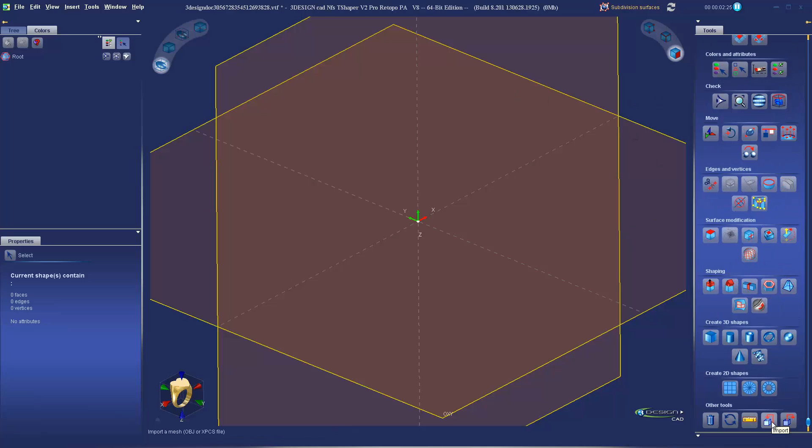The first feature I want to talk about is importing. A lot of users have requested better importing of objects from other softwares. And one thing that helps with that is, let's go ahead and import. I have a ring set up here.

This ring was created in 3Shaper, and then I exported it out to another sculpting software. Like most sculpting softwares, it remeshes your item to be able to sculpt in the other software. When I bring it back into 3Shaper, we notice that there are some small holes where things didn't quite line up. If I look in box mode, there's nothing wrong with the mesh itself, the polygons are all intact. But sometimes your control points, your vertices, get superposed, meaning they're on top of each other but not quite connected. So in smooth mode, we see little tears in the surfaces.

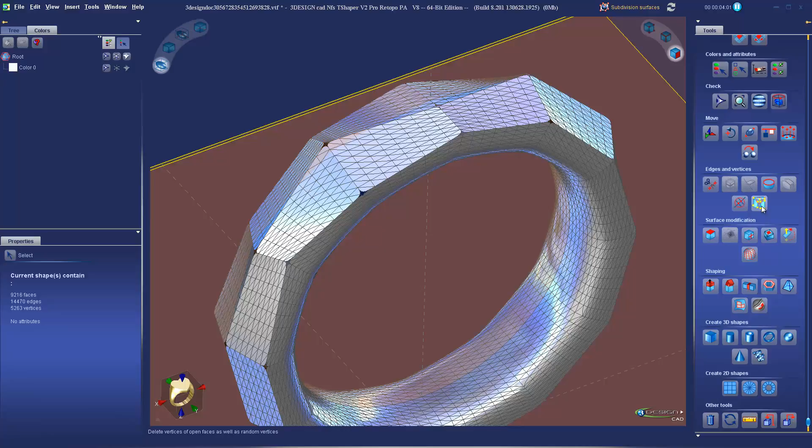The easy fix now is the new Connect Vertices tool. Before, you would have to find these and connect them one at a time, you'd have to know where they are. The new Connect Vertices tool, as soon as I launch it, will display all those bad connections. With a simple click of this button here, Merge Vertices, it's going to fix those holes for us.

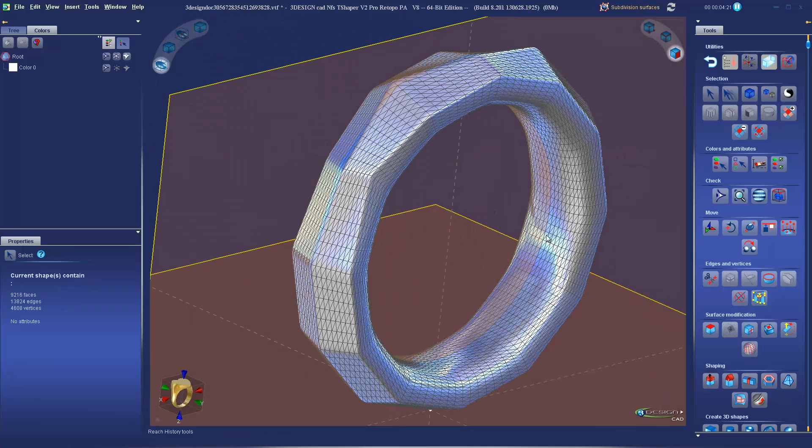Now, if I go back into 3Design, we see I have a solid object. It's ready to go. I could shape it further in Shaper, come back into 3Design, maybe add some pave or stones or whatever else I want to do to it. So, great new improvement on importing.

Speaking of sculpting, I want to talk about the new brush tool. Here's another model I've imported, an OBJ I found online, and you see it's already pretty well refined. Instead of having to go in and modify all the points, edges, and faces by hand, a simple way to maybe add some detail to this guy is to use the new brush tool.

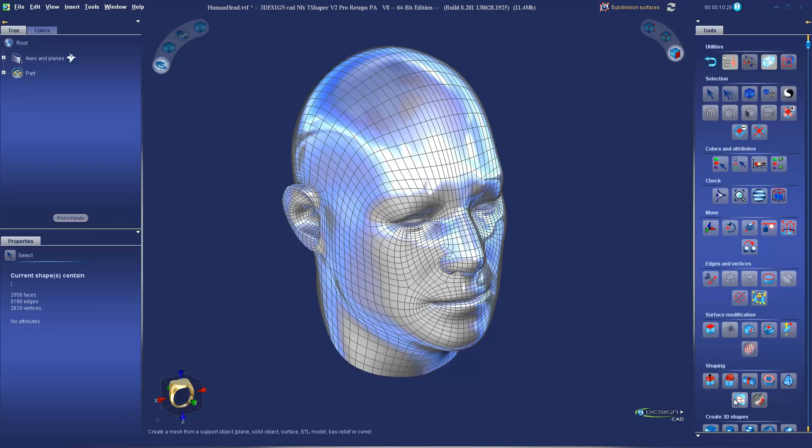It's located in the shaping section, and it's called brush. If I launch the brush tool, we see my cursor changes to this little purple icon. The icon shows the size of the brush as well as the brush shape, that little triangle shape you see. You can change your brush shapes from square to triangle, round, sharp, or smooth.

You can also change the strength and radius of the brush. You can also change the radius with a shortcut: if you hold the Shift key and then scroll your mouse wheel, you can quickly change the brush size. So you can switch back and forth without having to go over to properties.

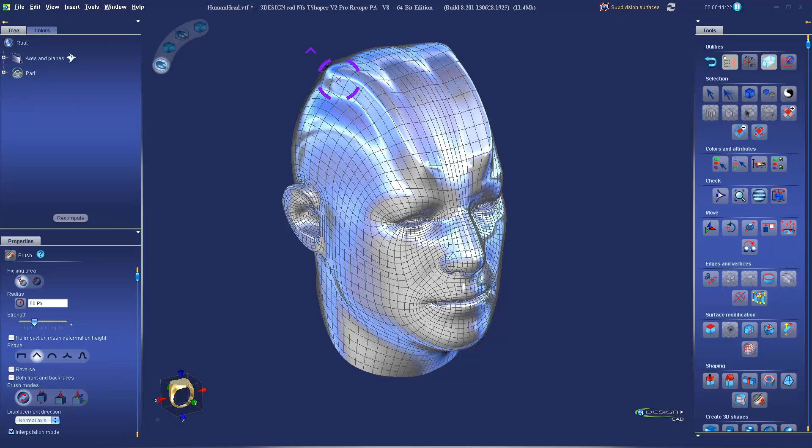So I've set this head up with some symmetry, so I'm going to work on the left half and it'll automatically mirror over. You can see I can brush in some details by just running over the refined mesh. Maybe we'll add some ridges to his head, make him a little more alien.

So that's just the standard brush mode, which is push and pull. If you want to push instead of pull, hold the control key. You see the icon changes, and you can push into the mesh instead of pulling out.

The other mode we have is smudge. Smudge automatically switches the tool to smooth. Again, we can change the size of the brush. With smudge, you can kind of just smudge around the mesh. Instead of pulling or pushing it, you can do a little bit more subtle shaping of the objects, like so.

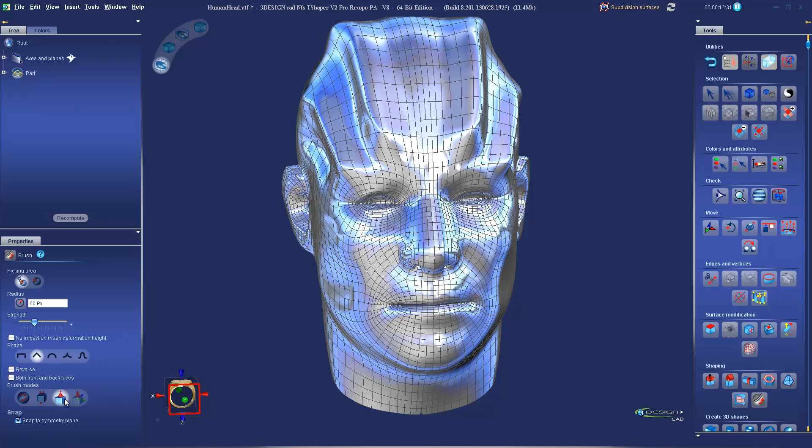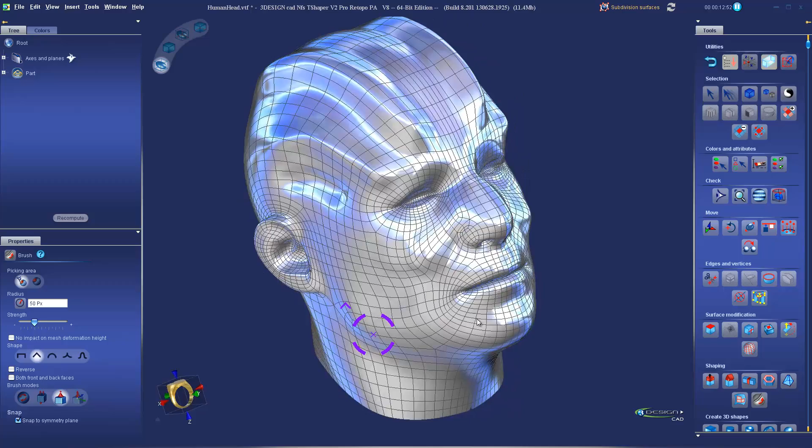The third mode is grab. With the grab mode, you can pull on the surface. It's especially great if you're trying to modify large areas, not trying to add ridges or textures or anything, just want to maybe make his nose wider. He needs a little bit of a nose job. You can just grab those parts and move it. He looks a little sad, so maybe we'll give him a bit more of a smile.

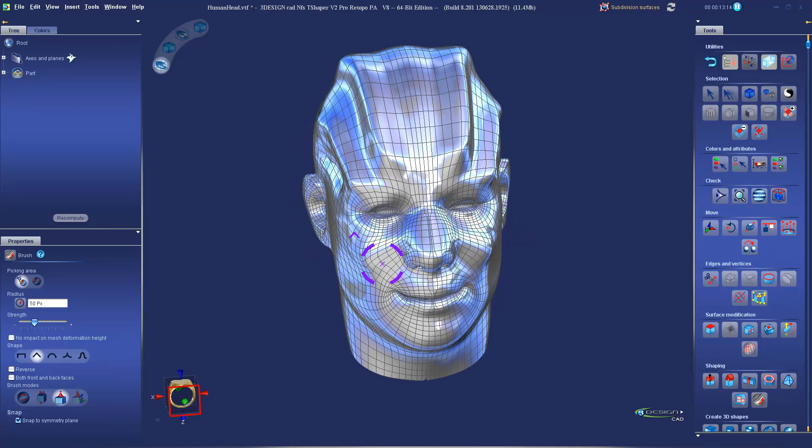So you can quickly and completely add and change details to your model with the new brush tool. With this file, we're going to take a look at selection tools, symmetry, and colors.

Let's start with the selection tools. There are 4 new tools I want to point out. We have the regular selection you're used to, and right next to that is the new paint selection. With that activated, you can run your mouse over faces and select them really quickly. This works in faces, edges, and vertices.

The keyboard shortcuts for that: if you have a selection and want to add to it, hold Shift and paint further selections. If you want to remove a part, hold Control and paint over that to take it away from the selection. So Shift to add, Control to subtract from the selection.

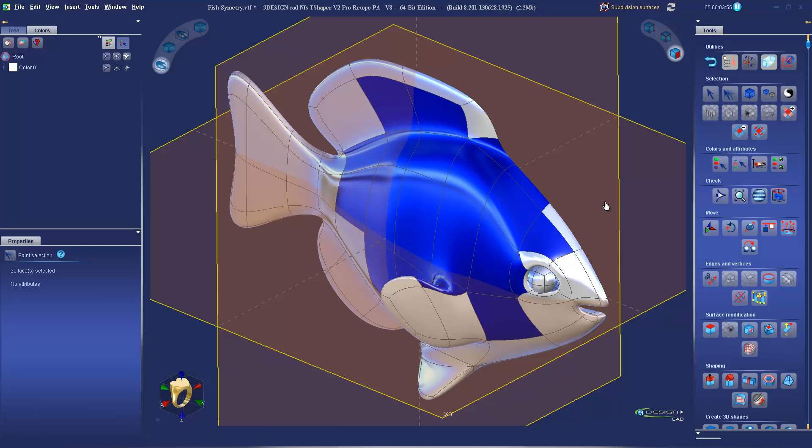We also have Extend and Collapse selection. This works in all 3 modes as well. Extend just extends the area of the selection, growing it outward. You can also collapse the selection to bring it in smaller. So, grow, collapse. This makes it really fast when you have a refined shape and want to select big patches of areas.

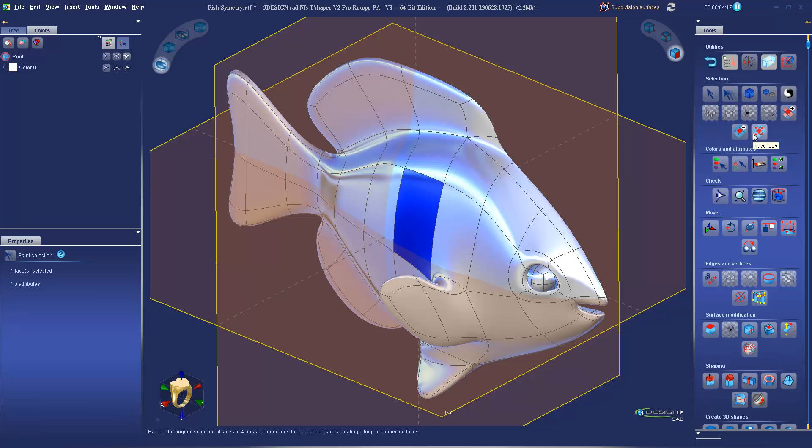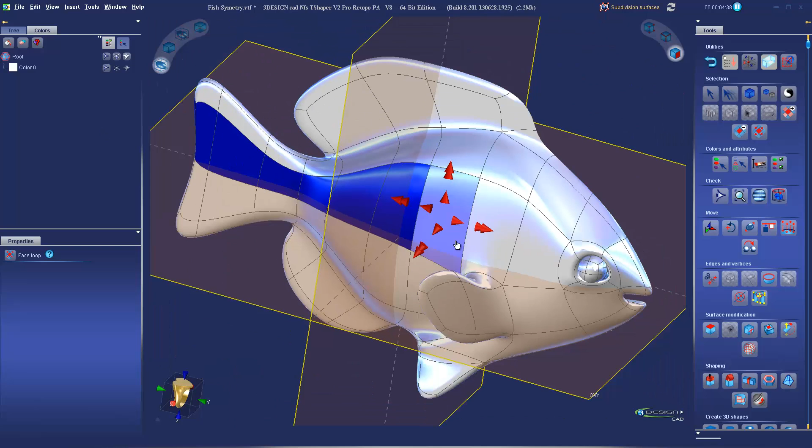Finally, this one only works in face mode: Face loop. If we have a face selected and click on face loop, we can now use these little red arrows to extend the selection in those 4 directions. The small single arrows extend it one at a time in either direction, while the double arrows extend it all the way around the object in either direction.

So all those tools make selecting much faster and easier in V2.

Okay, you'll notice my fish, I've already cut it in half. It's all set up for symmetry. I've deleted half the faces and aligned all the vertices right in the center. So we'll go ahead and take a look at symmetry real quick.

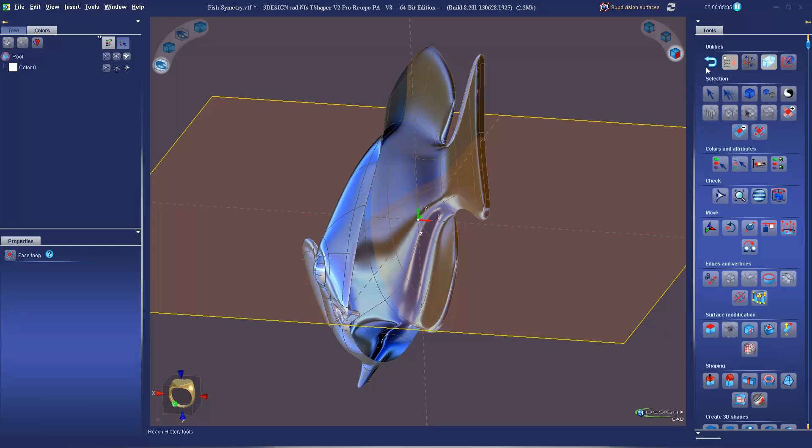Symmetry works very similar to the way it worked in V1, pretty much the same. You're going to exit out of the edit tools into the submenu. This is where we find our symmetry and construction tools. These are all parametric parameters we can add to our objects. In this case, I'm going to use a regular symmetry. You'll also notice we now have circular and matrix duplications as well.

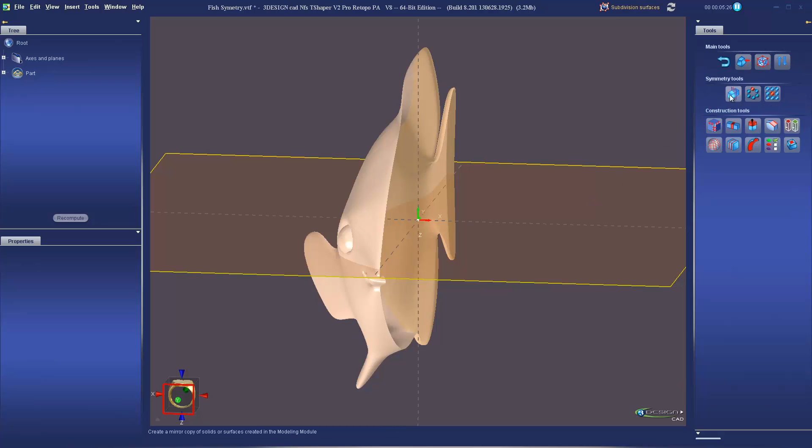We'll do a mirror on this one. It automatically picks the most appropriate plane, though you may have to do that manually sometimes. In the options, we'll go ahead and weld it so that our seam in the center is welded, making this a solid object as we're working on it. Validate, and now we have the other half of the fish.

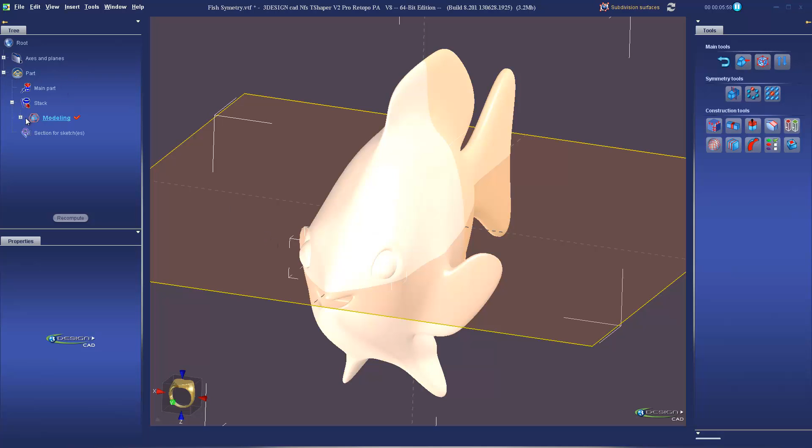Now, if you jump into the edit tools here, it's going to add a new surface and lose that symmetry. If you want to edit this with the symmetry on, go into your history, find the model you're working on, and expand it. Here's that mirror that we added, and underneath that is the original surface. Anything above this will stay parametric, so I can edit this surface by double clicking it, make my changes to my object, and it will stay symmetrical on the other side.

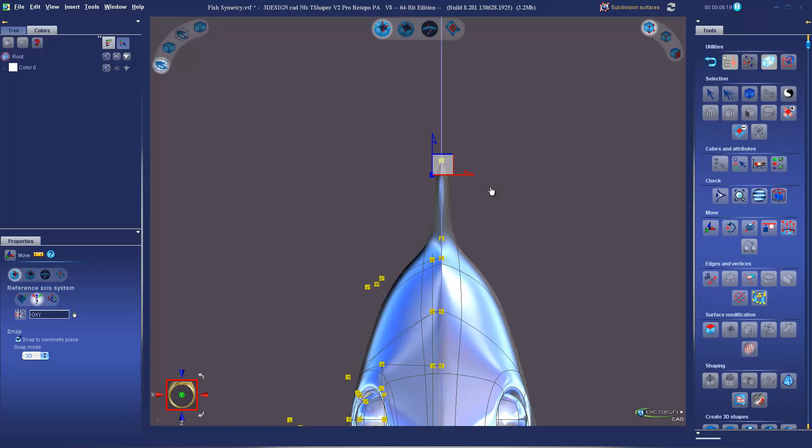Okay, another cool trick in V2: if you move a point away from the center, obviously the seam gets split. Now, to get it back to the center, it automatically snaps to the symmetry plane. So, a small improvement, but it makes things way easier if you're trying to keep your center seam welded nice and clean.

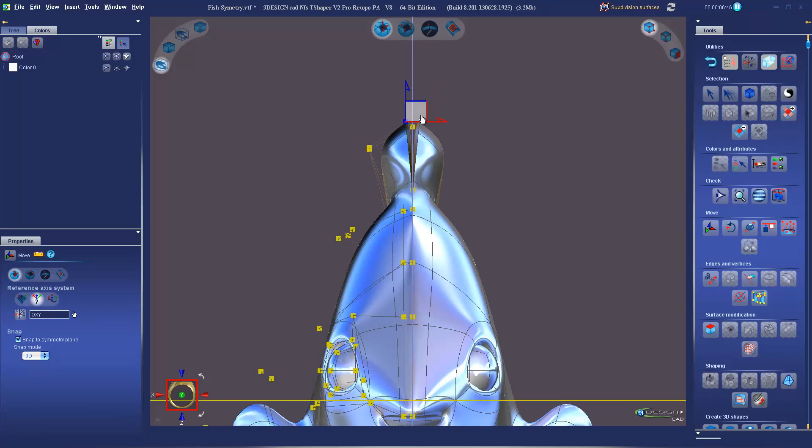Okay, finally with this file, I want to show you how you can add colors so we can color code parts of our object. This works in face mode, and there are 2 ways we can color code.

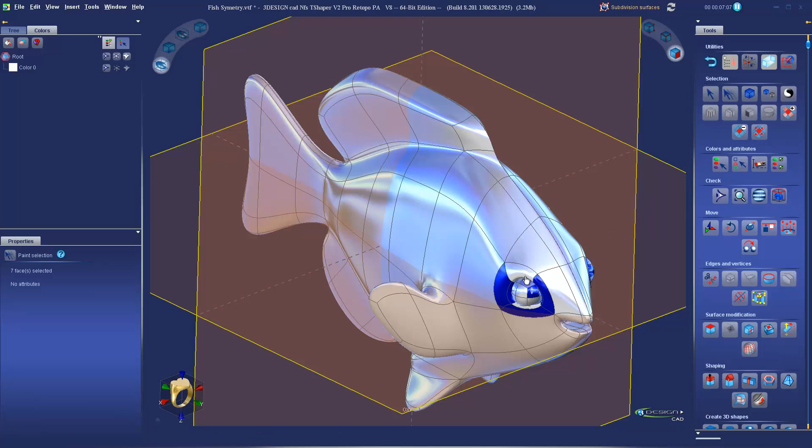We can make our selections first. I'll do a paint selection here. Let's say I want to work on this eye section here. I can give that a color by clicking the create a new color group in the color tab. That adds a red color. It's pretty random what color it adds.

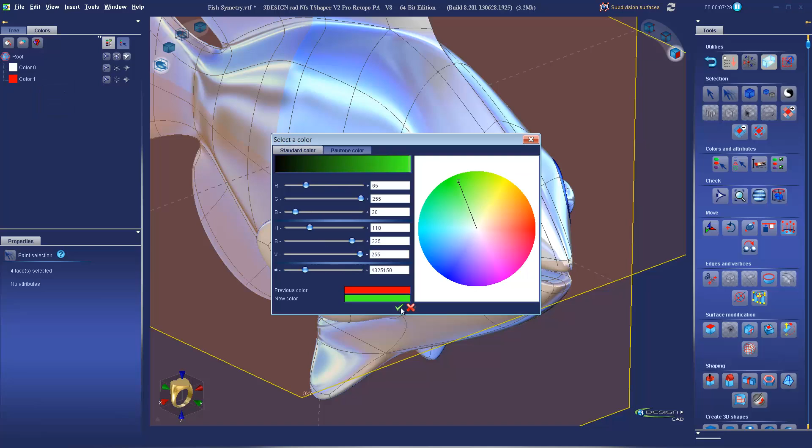You can right click and rename or change the color if you want to choose something else. When you deselect, you'll see that the eye is now selected, or colored in a new color.

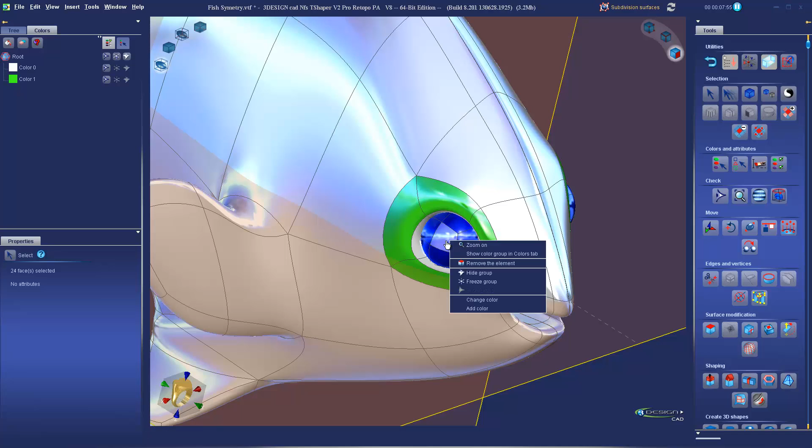Okay, maybe his eyeball we want a different color. I'll use the double click and select the entire, make sure I'm on the right tool. Select the entire eye. Another way we can add color, instead of adding it here and then dragging it onto the selection, is if you right click the selection you can add or change the color right here. So we hit add color and we'll choose the color we want.

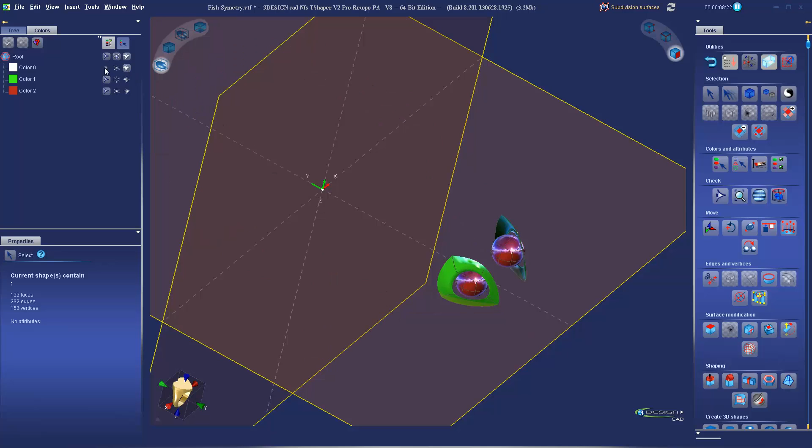Quickly change the color. Now the nice thing about colors, we're going to be able to use them with parametric tools a little bit later. But it also makes it nice if you want to work on a detail and maybe hide the rest of the fish, so I'll use the new show, hide, and freeze buttons here.

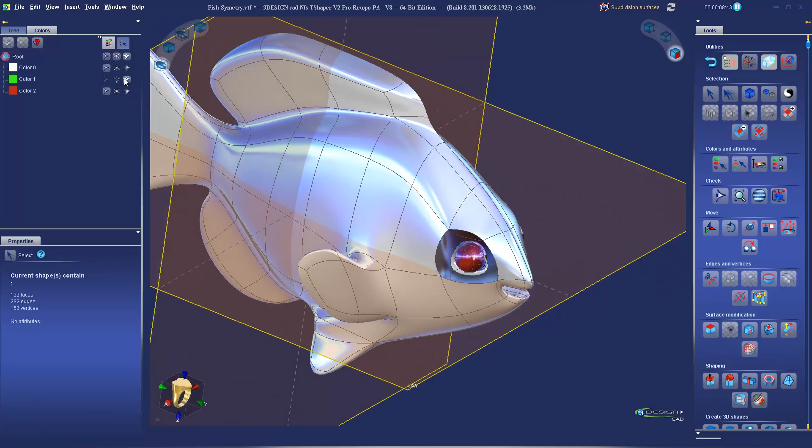You can quickly freeze parts, hide other parts, etc. The buttons at the top will freeze, hide, or show the entire groups. So for example, I want to hide the white body and the red eyeball so that I can just make adjustments or selections on the eye.

Might want to freeze the body so I can see that I am still affecting it, but I can't accidentally select the rest of the fish, just the part that's showing.

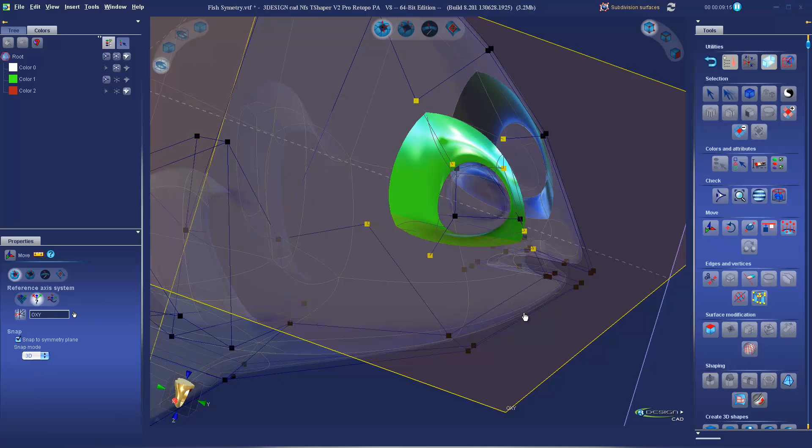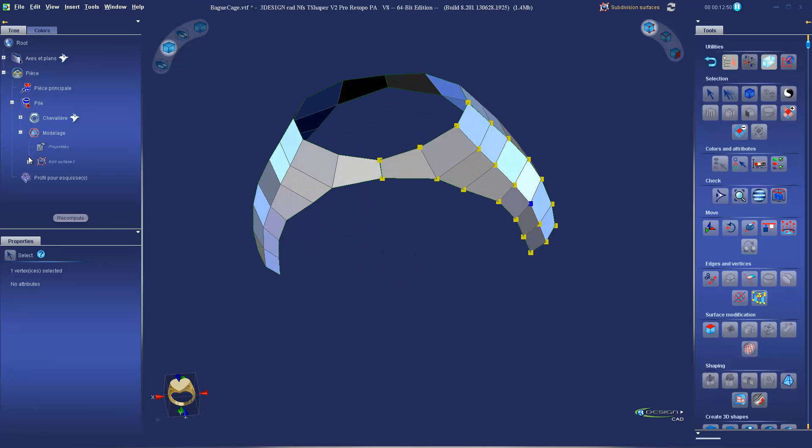And then we'll go back in and double click that edit surface to work on our TShaper surface.

Okay, the first thing I want to do is talk about attributes. Attributes are a lot like colors, where we can assign attributes to parts of the model. We can assign those to vertices, edges, and faces.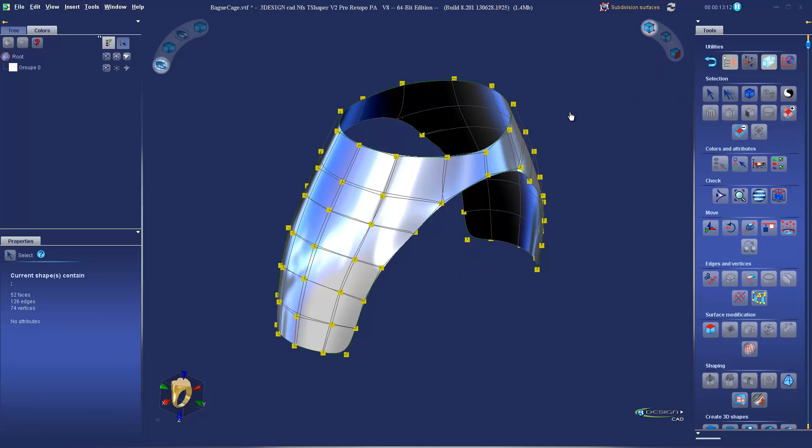I'm going to assign them to edges. I'm going to go ahead and do a select all and select all the edges here. And then here in our colors and attributes section, we have a create and assign attributes button. So this allows us to create the attribute on those edges.

So we'll hit the plus to add an attribute, and we can either do that by a tag or a numerical value. So the tag allows me to rename this attribute to whatever I want. I'm going to call it edges.

And click there. So if I deselect that and now use this other button here, select by attributes, it brings up a selection menu for all the attributes I've assigned, and I can select those edges really easily.

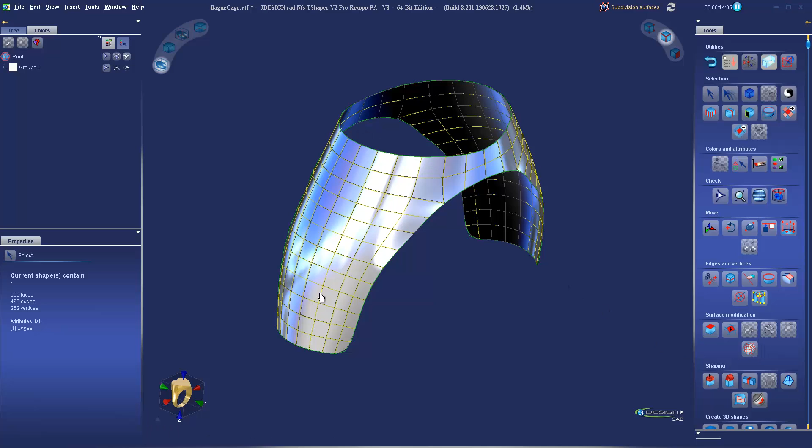Okay, I'm going to go ahead and refine this model just one time. So as you know, refine quadruples the number of faces and edges, etc. And then I'll go to my attribute selection, and you can see I can now select just those edges that I assigned the name to.

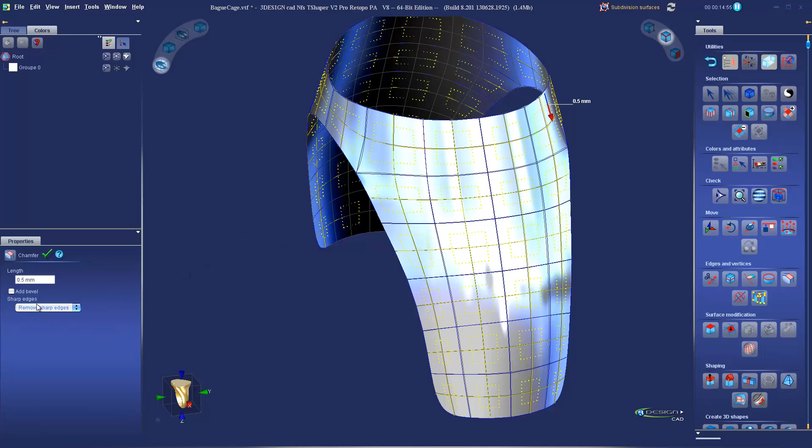Okay, next I'm going to go ahead and chamfer those edges. I'm going to chamfer them with a 0.5 millimeter length, that's the default, but I'm also going to add a bevel. When I validate, we get these nice little squares, the little chamfer, and the bevel creates the triangular portions. So we get this nice pattern.

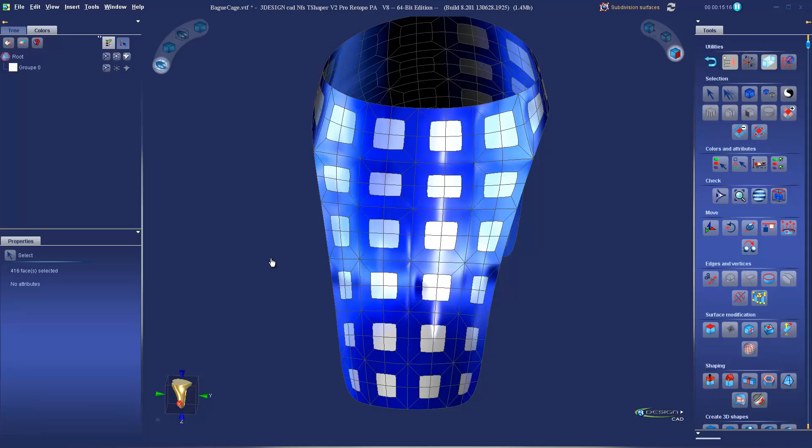If I select faces, because that selection was already activated, it's going to automatically select all the faces except for the new chamfered area.

Go ahead and take this opportunity to add a color to that in case I need to reselect it again later. Drop that green group on there. There we go.

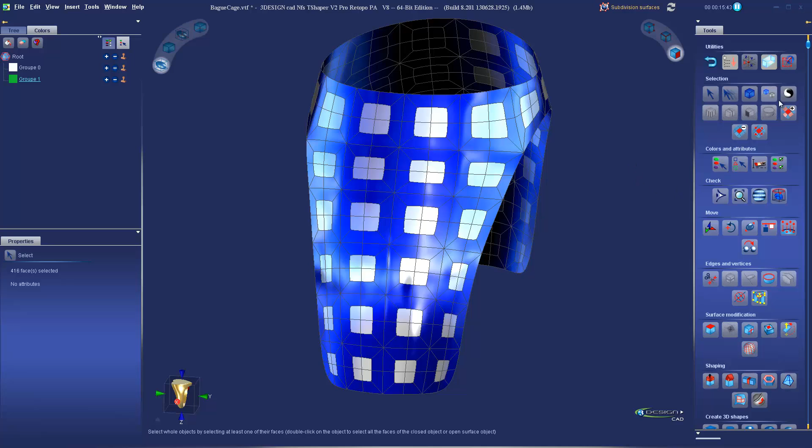And I want to get rid of the white section, so I'm going to do an inverse selection. That's to reverse the selection. And we'll just delete those faces. So we get this nice cage pattern. That's exactly what we were going for.

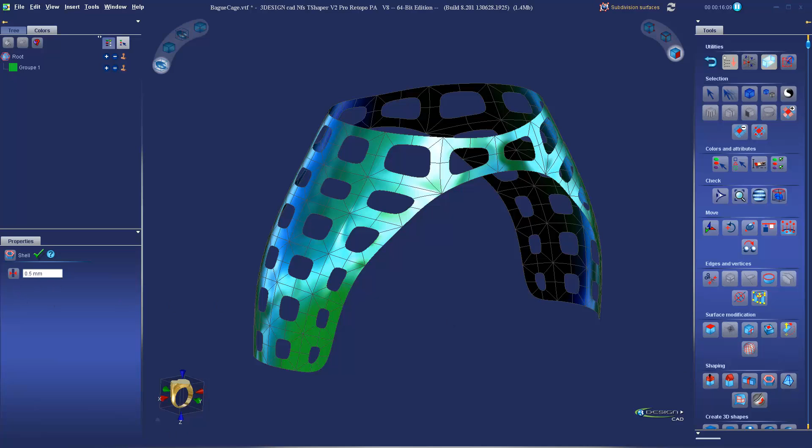If we go ahead and now create a thickness, we can do that here with the shell tool. That just allows us to choose how thick we want the piece to be. Validate. Oops, helps if I select them all first. Shell. Validate. And we can see we can add a thickness to that surface.

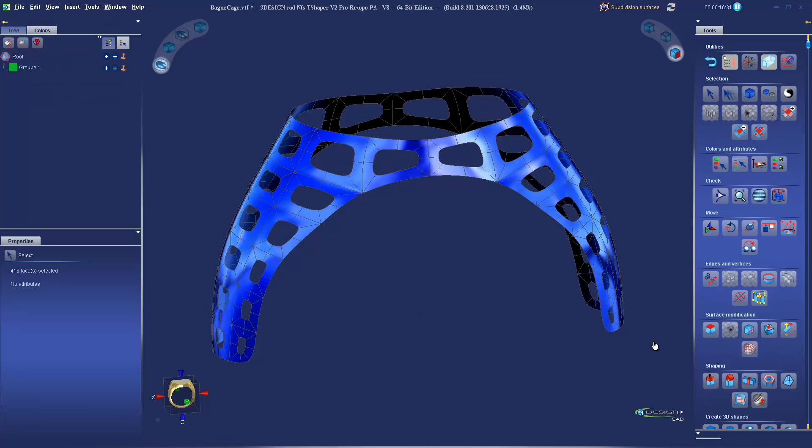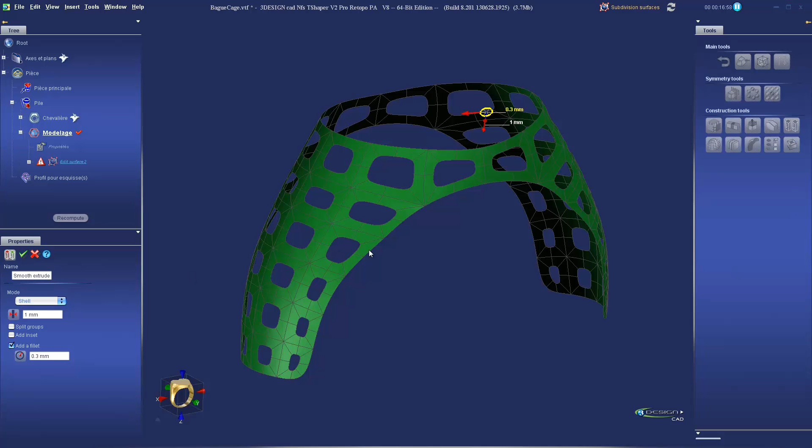We can use a shell mode or a flange, or split groups if we had this color code in different parts. We want to shell the whole thing, and we'll choose our thickness. I'll do 3/4 of a millimeter.

It will also add a fillet, so 0.3 is the default. It's going to round off the corners just like a normal fillet in the CAD side of things works. And we validate.

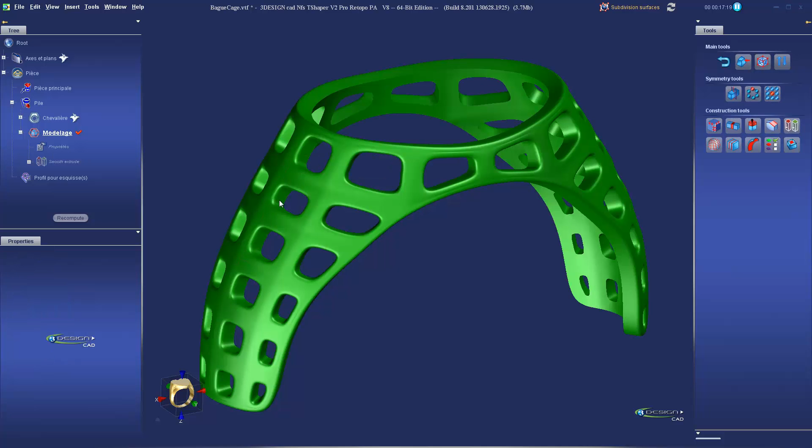We get this nice extrusion with little filleted edges, a much nicer object.

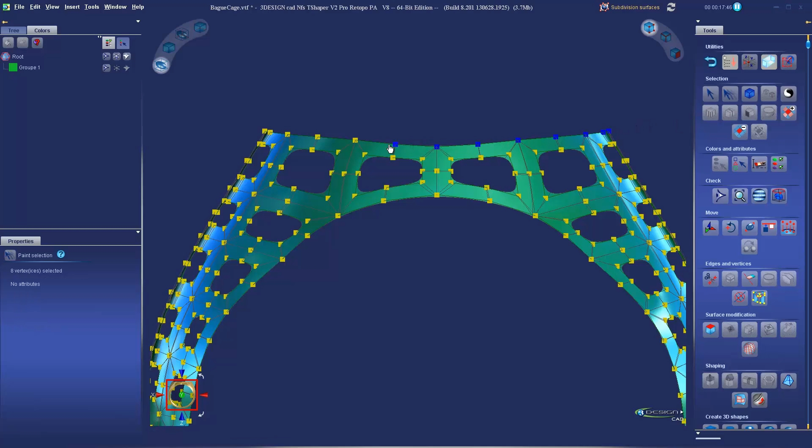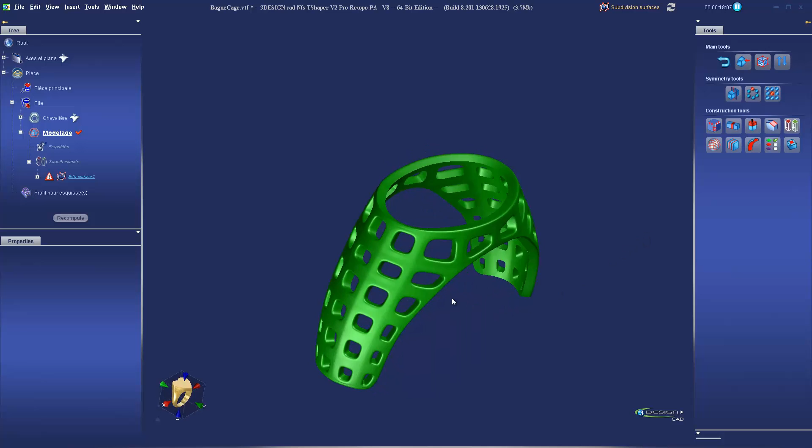And it's parametric. So just like in the symmetry, if we go underneath this model back to that edit surface we were working on, double click it, we can go in and make any changes we need to our piece. Do a paint selection here all the way across this top edge, maybe do a little alignment, so it brings that edge up flat. Now you'll notice when I exit out of the editor, that change takes effect, and anything on top of it, so our symmetries, or in this case our smooth extrude, we still have that 0.75 with the filleted edges.

In this file, we're going to talk about some improvements to existing tools, namely the extrude tool. We can extrude edges. Let me go into our model here.

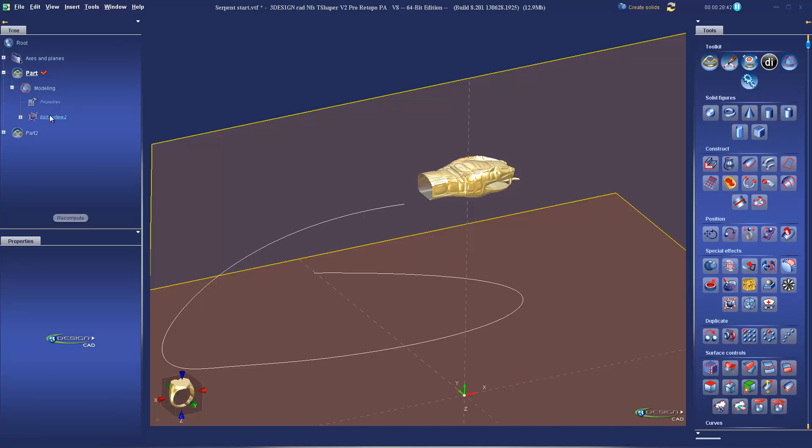We see we have this little snake head that's been pre-made in TShaper, and we've got an open end here. We want to extrude that out into the rest of this model. To do that, we will select this border edge, and we can do an extrusion, just like before.

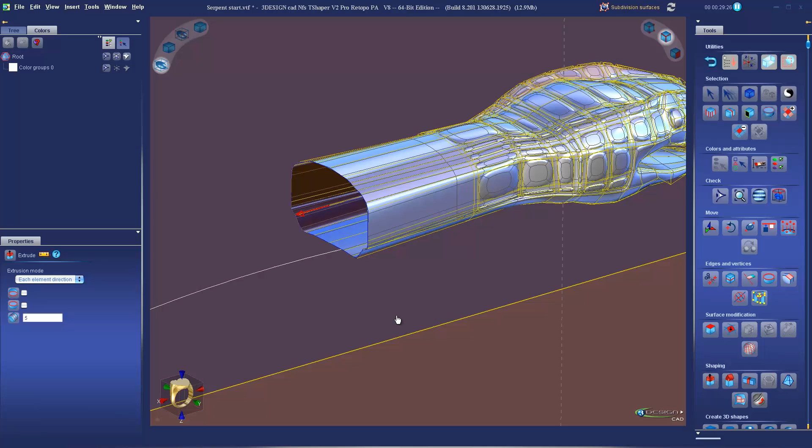In extrusion, we can force sharpness on both the front and back side of the extrusion, as well as choose the number of subdivisions as we extrude. So that's the regular extrusion. We now have a new advanced extrusion tool.

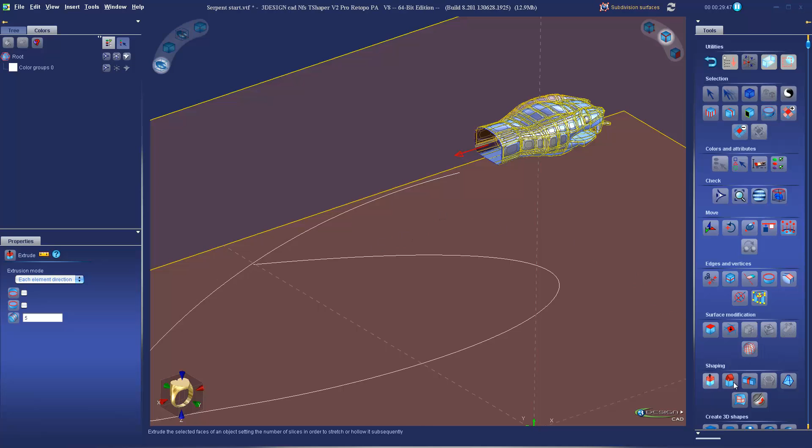This is going to allow me to extrude along support objects, namely other objects, planes, or even curves. I have a curve pre-drawn here. This is a regular 2D sketch curve. What I'll do is launch advanced extrusion.

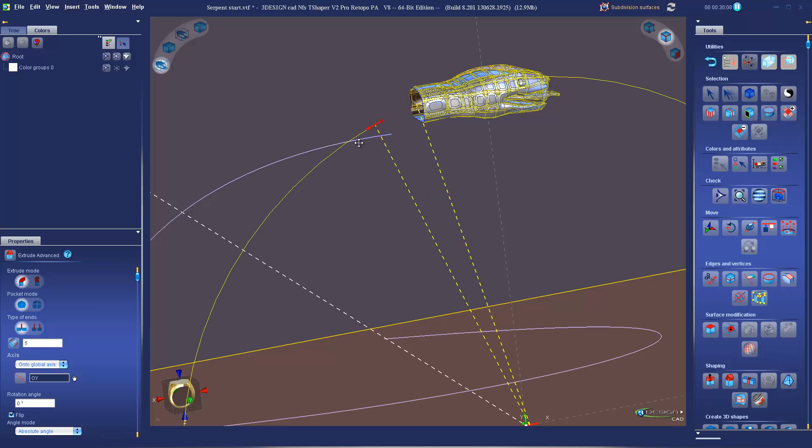For the type of extrusion, you see a bunch of new options here. We're going to change the extrusion mode so we can do it around an axis, by selecting this little arrow here. And you see the extrusion is following around a circle around the axis that's chosen.

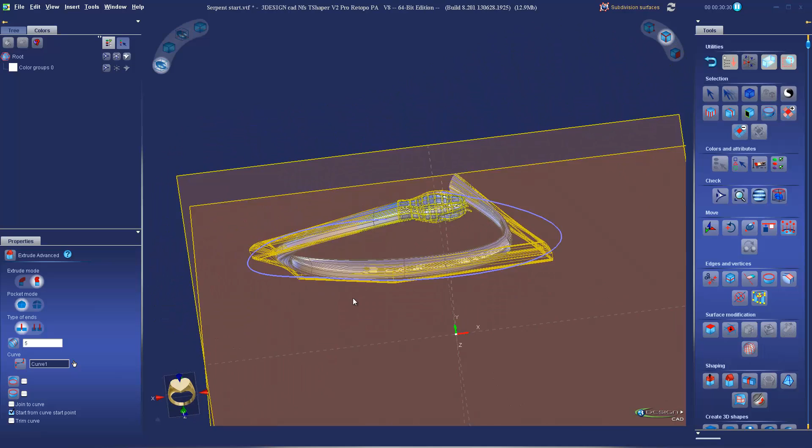Or we can do it along a curve. We'll go ahead and select the curve, and you'll see the extrusion follows the curve. Now you'll want to change the number of subdivisions so you can match the curve a little more precisely. So once we have enough subdivisions here, you can see that we're now following that shape.

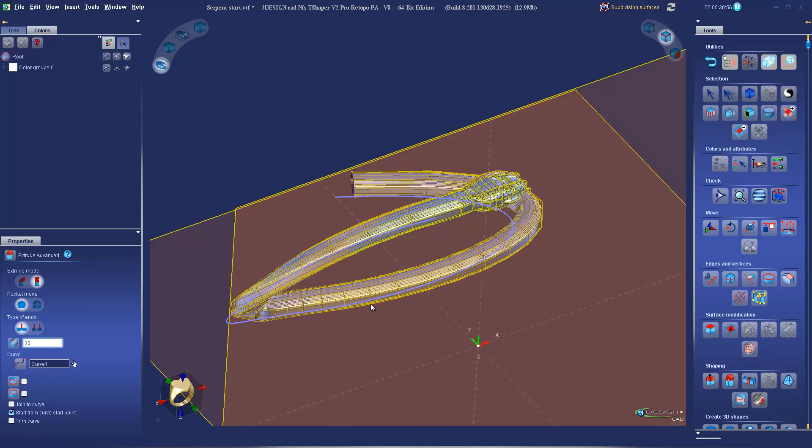Okay, so a few other options in here. You can change the end types from merge to split. We can do a connected or split on the pocket mode - we'll see a few of those a little bit later. We can also join to the curve, which will just move the extrusion so that it fits perfectly on the curve and now just follows the definition of the curve.

You can also trim the curve. So if at this point you decide you didn't want to go all the way to the end of the curve, you can trim it right here inside the tool.

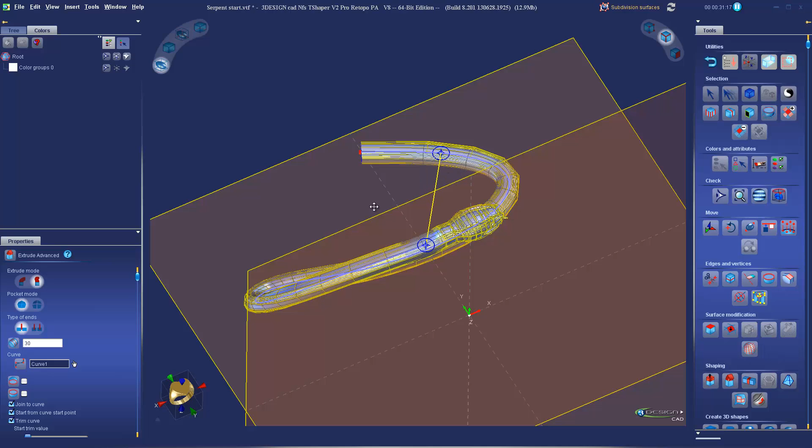So the next question would be, now if I change that curve, will this update? And the answer is no, it will not. This is not a parametric tool, so if I change the curve, the TShaper object doesn't change. But we do have a parametric tool to do that instead. So let me go ahead and step this back where we were.

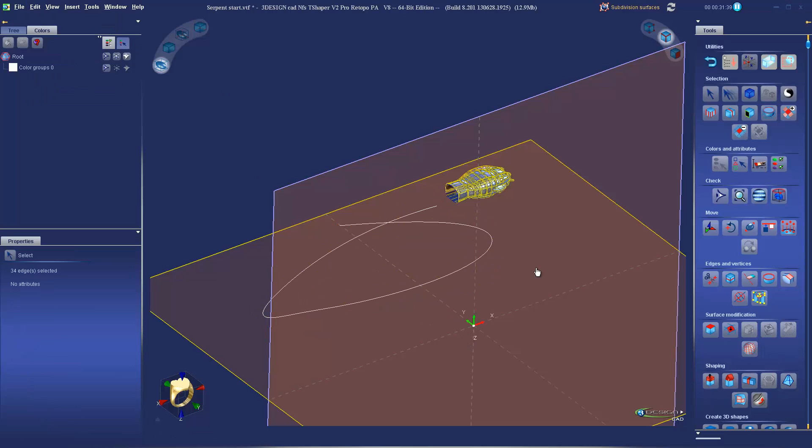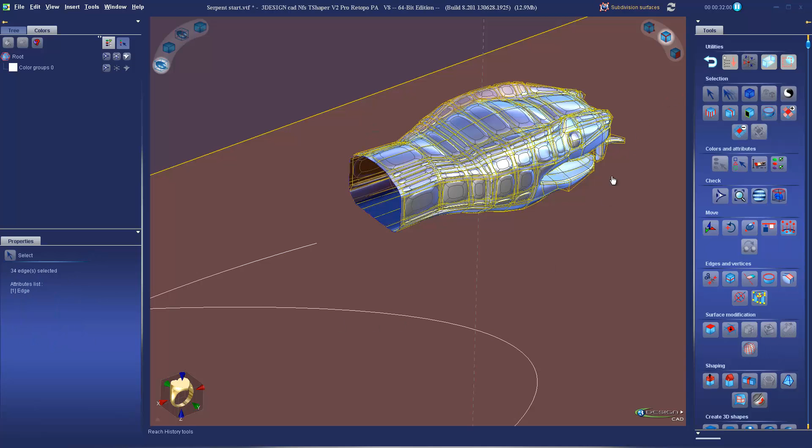To do that, we need to assign an attribute to this edge. We'll go ahead and create an attribute, create a tag, and I'll call this edge. Then we're going to exit out of the edit tools into the sub menu, and we'll do our extrusion here using the extrude parametric construction tool. When I select that, again we get a bunch of different modes. In this case, I'm going to do along a curve.

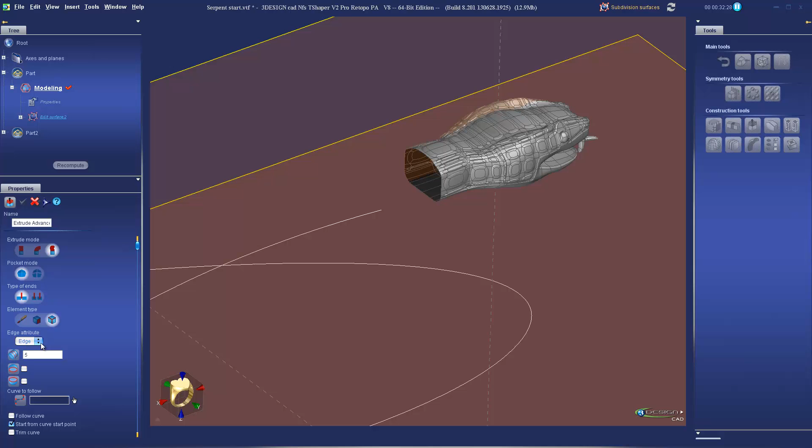The element type is going to be an edge, since that's what I have assigned here. And we choose the edge attribute, the one that I assigned. It's the only one, so it's defaulted here.

Okay, we go ahead and select the curve to follow, and we see a little bit of a preview of what's going to happen - it's a little red line. Again, we'll want to subdivide it further. Let me do 20 sections there, so we get a nice smooth extrusion following the curve. So go ahead and validate.

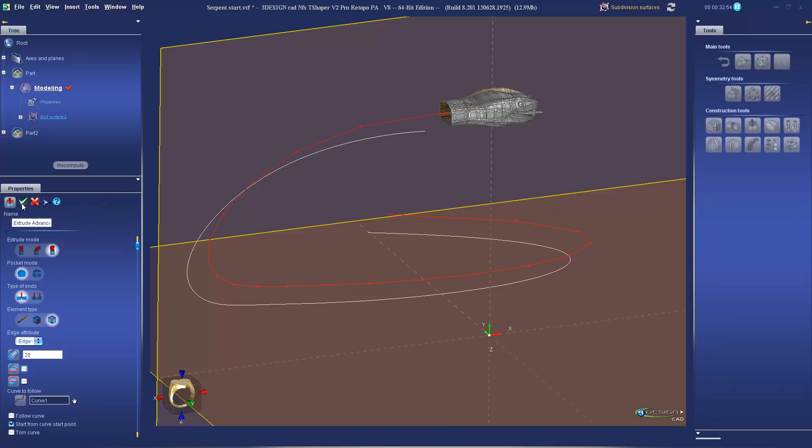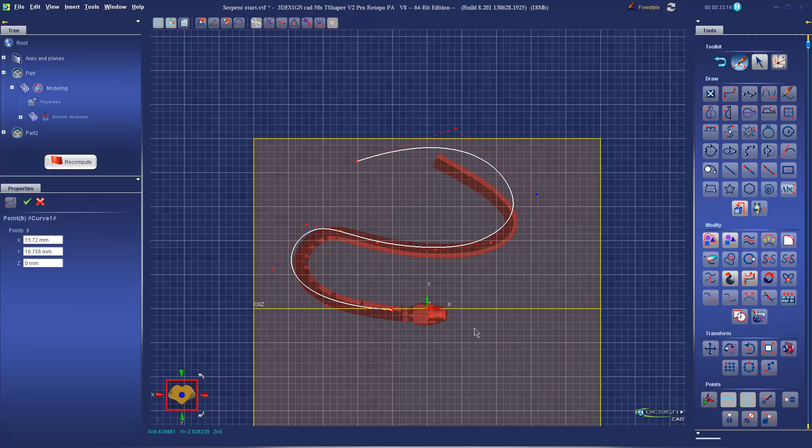That'll create the extrusion, and we get to the same place we were before, but the nice thing is, because we've added this extrusion parametrically to our tree, if we go ahead and exit out and we decide we want to adjust our curve, just double click back into the sketch curve, make some changes, and simply recompute. So very powerful - you can add some parametric properties to your TShaper objects.

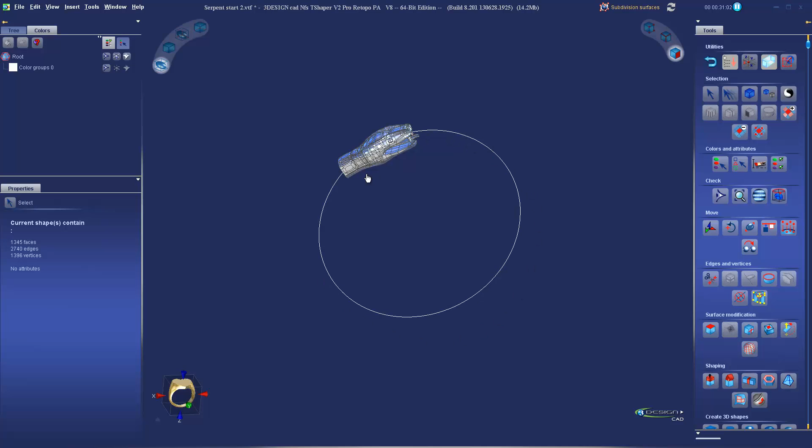Finally, I want to show you a couple more improvements to the extrusion tool as well as the bridge tool. So for this ring, we've set up the snake head around a typical ring size. We've positioned them over to the left a little bit. And what we'll do is go ahead and exit the editing tools, and we'll do a symmetry.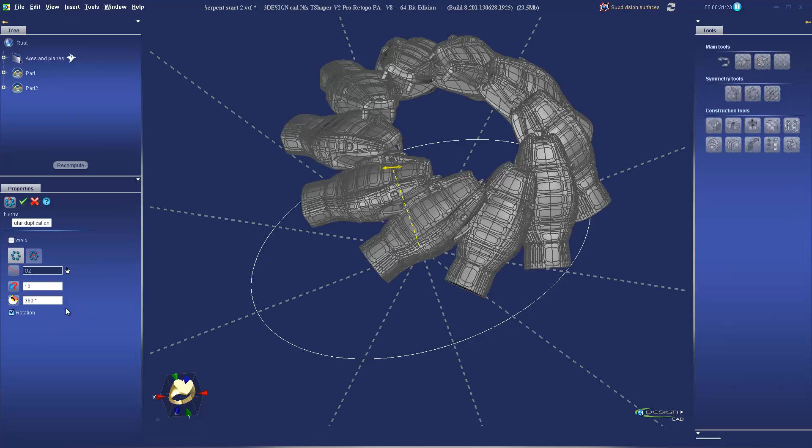I'm going to use the new symmetry instead of having to mirror this twice and get rid of one. What you can do is a circular duplication. This will create the symmetry around an axis. I just need 2 copies, one for the left side, one for the right side.

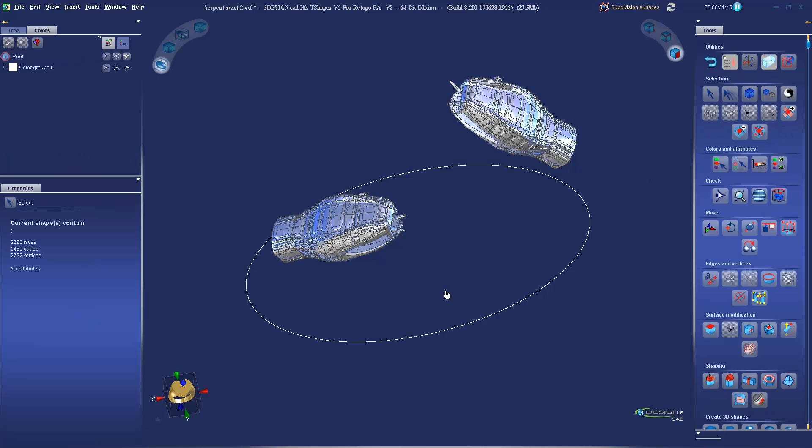Okay, I don't want to use the parametric properties of this. I want to be able to attach these two together. So I'm going to go ahead and reach modeling tools. It's going to add another edit surface on top of that and keep these as separate objects.

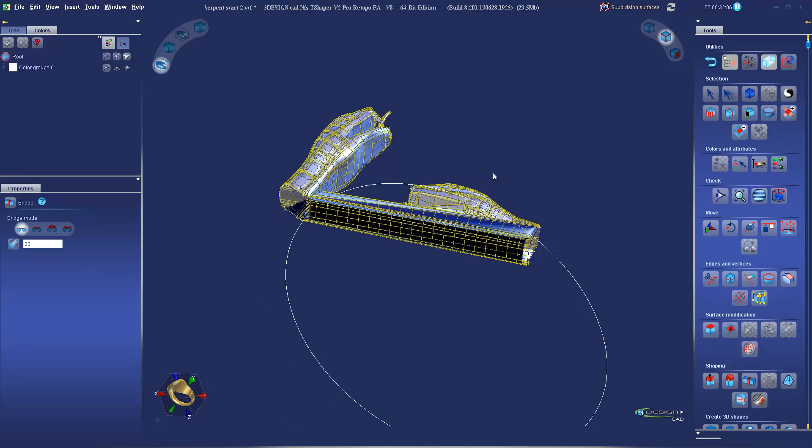Now what I want to do is bridge the 2 open areas together. So I'll go ahead and select the borders on both ends, and then we'll bridge those together. Now in version 7, the bridge does the standard straight across bridge. We can now add subdivisions.

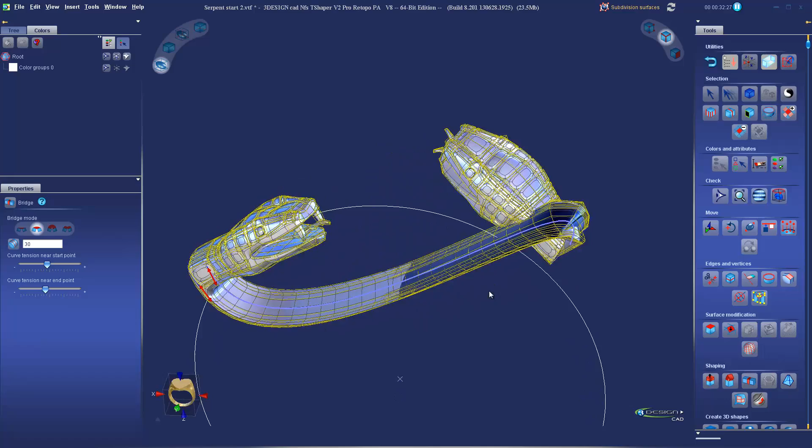And we see, well, that's not quite what I'm going for. There's 3 other modes now. Curved mode is going to give us 2 tension curves that we can use to create our bridge. Again, the way these are lined up, that doesn't quite work.

We can go around an axis. So almost there - this is going to bridge it and then spin around a center axis. Again, not quite lined up for that.

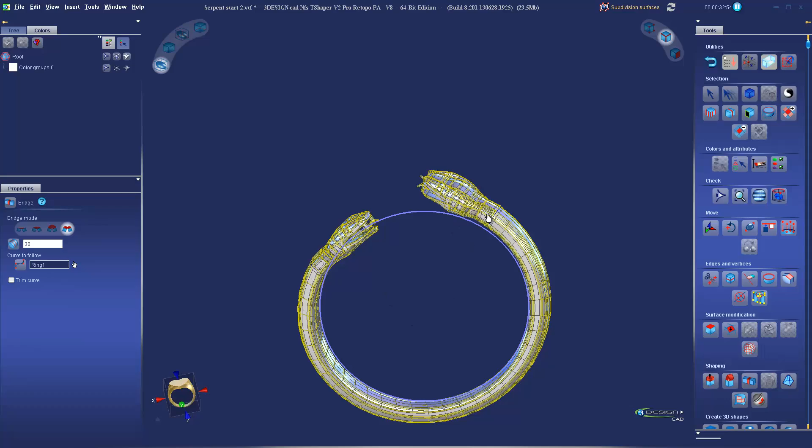So what we'll do instead is along a curve. So we'll choose the curve to follow, which will be our ring size, and it's going to bridge those 2 sections following our curve outline. Okay, this can also be done in the construction tools, so it'll be parametric to the curve.

Great little trick for making rings. Now we've got a nice texture on his head. Let's add that texture to the rest of his body.

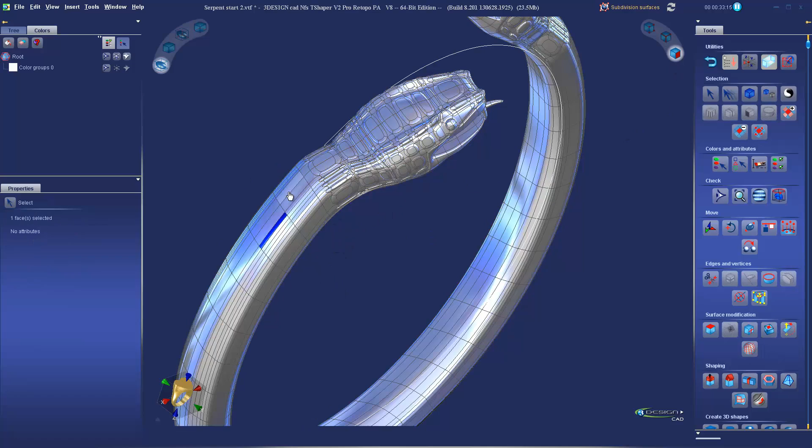So we'll go ahead and use our selection tool, the face loop, and we'll just grow the selection to the parts that we want to extrude out. So we'll get that row selected and then select all the way around to the other side.

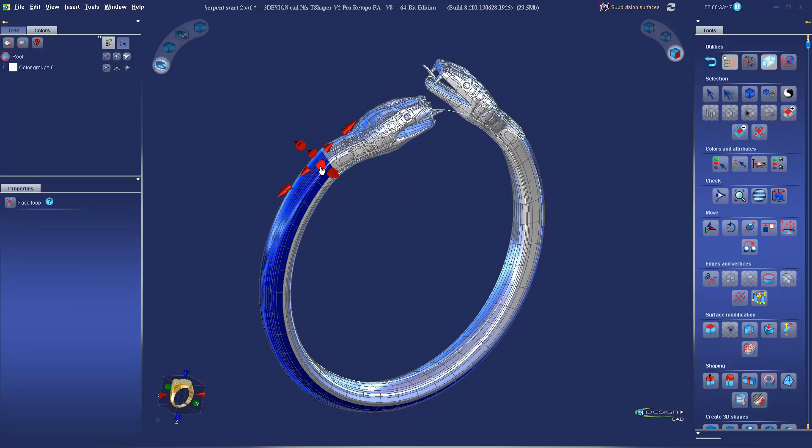Alright, looks good on that end. Let's go back around there a couple more times. Looks good. Now here's where I'll go ahead and create a color group and drop that on there just in case I need to reselect just those sections.

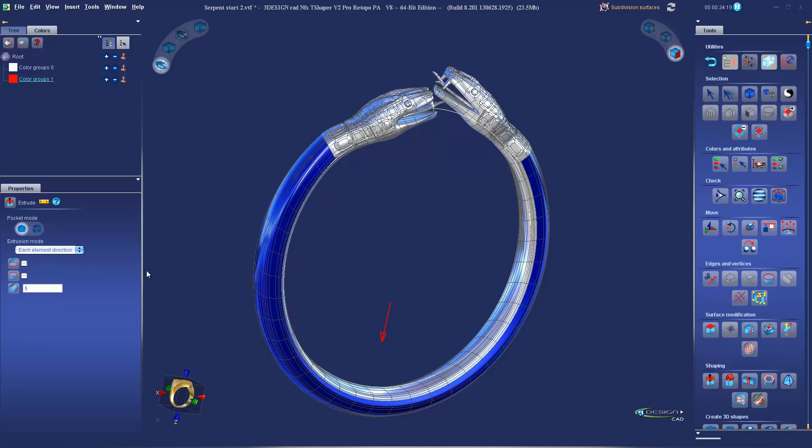We can do so by clicking there, and we'll do the extrusion. So like I said, that improvement to the extrusion - we have pocket mode now, where we can do a regular connected extrusion, so this will all extrude out as one face, or we can split it. And in this case, we want to split it. This will create a nice texture on each one of those faces.

So we can just pull on the arrow and extrude it, or we can use the ruler. That'll give me the option to type in the exact amount that I want to extrude. Okay, so let's go 0.15. And you can see that it's extruding each one of those faces into a separate piece.

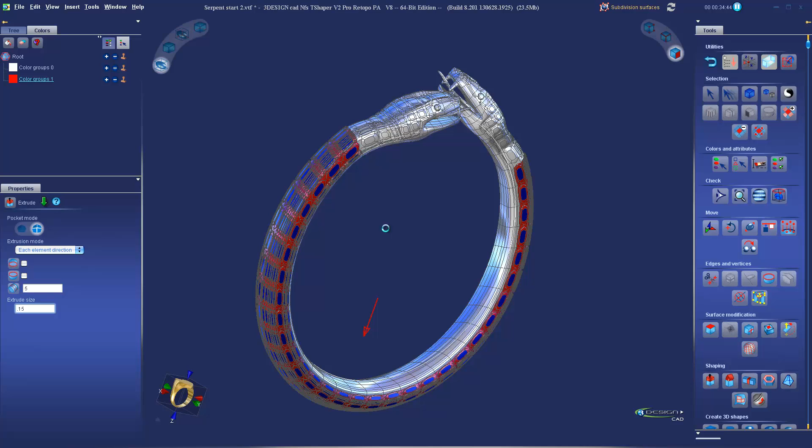Great quick way of doing textures. Let me unselect that so you can see - and there's our finished ring.